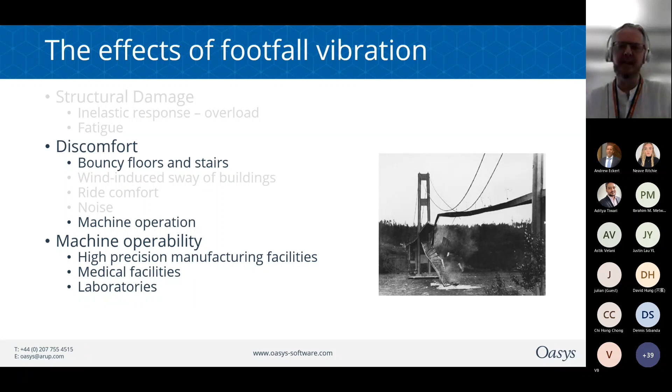But with footfall vibrations, this is something different. This is a serviceability limit state vibration, which is more about discomfort in the office or on the stairs, or operational problems such as we get in laboratories and hospitals.

So when people walk along, their feet impact the surface and this generates an impact force, and people tend to walk at a given pace. As the frequencies of the impacts are reasonably regular, these can set up resonances with the natural frequencies of the structure, which then cause it to vibrate.

But also you do get some floors which don't resonate because their natural frequencies are very high, and there we're looking at the momentary or transitory vibration problem which occurs on each step.

Now, there have been a number of design guides over the years to assist with dealing with the footfall problem. One of the first was the American Institute of Steel Construction's Floor Vibrations Due to Human Activity, published back in '97. Since then, we've had a number of further design guides.

We have the Concrete Centre CCIP-016, a design guide for footfall-induced vibration of structures. Then the Steel Construction Institute, which has published a number of guides over the years, updated their latest one, the P354, on floor vibration - a new approach.

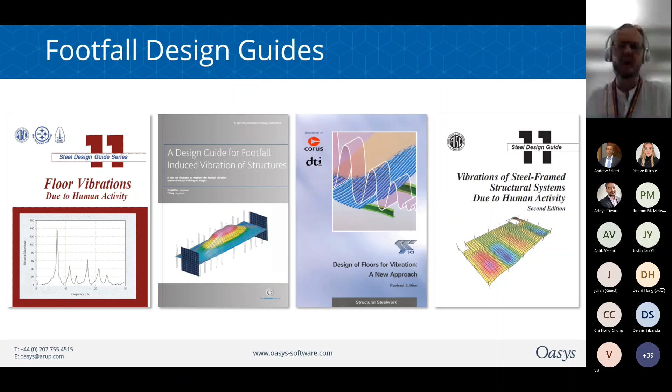And then the AISC updated their design guide 11 a couple of years ago, based on all the various research and indeed the other design guides which have come out over the years. Footfall analysis has also started being included in some design codes, and we'll look at that in more detail over time, along with some manufacturers' recommendations. So there is no one way of addressing this, apart from the GSA, of course.

Now, some of the guides do have simple methods to estimate the footfall response. In these simple methods, you take a standard floor closest to your actual structure, calculate the first two natural frequencies, then from there calculate the resulting velocities, accelerations, and response factors.

Now, these do have a number of assumptions built into them, and it is difficult to make them match up with the majority of real structures. Also, they have been shown by a number of sources to be quite unconservative and inaccurate in their results. But on the plus side, the formula there, 18 over the square root of the deflection,

is actually quite reasonable at predicting, at least approximately, the natural frequency of a floor. So if you can get the deflection from your model, that should give you a good indication, not totally, but a good indication of what the natural frequency should be.

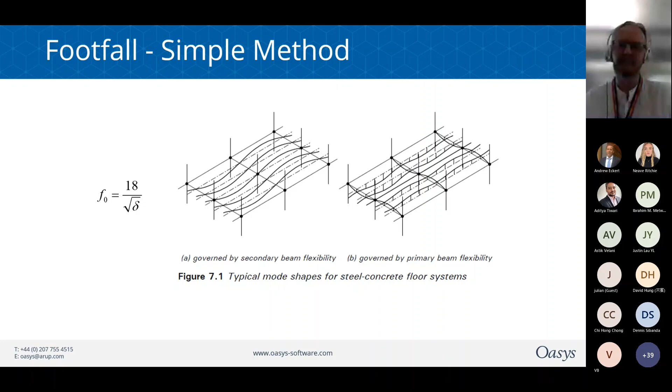Now, all the modern design guides do recommend that engineers use the finite element analysis approach. This FE approach requires analysis of a subframe, so in the case of a floor, or indeed the entire structure in case of a stair or a bridge, so the entire staircase.

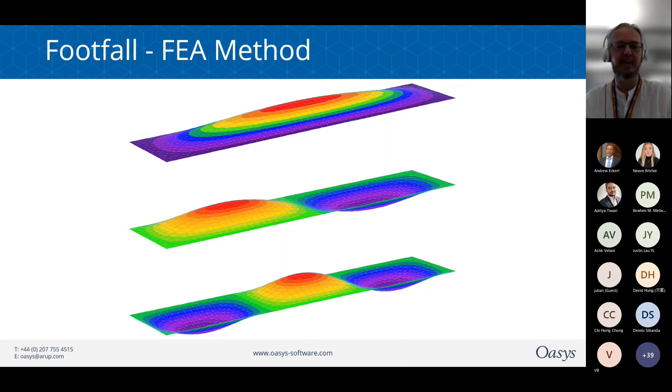It's a two-step process. First of all, you need to analyze to get your vibration modes with their corresponding frequencies up to a certain cutoff point. Now, what that cutoff point is really depends on the design guides and the respective maximum walking frequency you're looking at.

Now, when the structure vibrates, it doesn't do so with just one mode, which is the vibration shape or frequency, but with several modes simultaneously, even though the software will supply you with each mode as a separate result. Now, these modes actually interact to produce some quite complex movements.

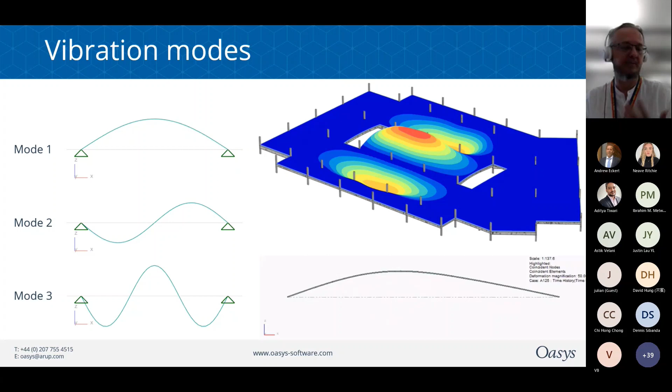And as you can see from the video on the bottom right, that is three beam modes acting simultaneously, in this case, with a time history analysis I did in GSA to extract those. Now, if you're looking at floor vibrations, these are considerably more complex than single beams, which again, is where the FE analysis comes in.

Now, once you have the vibration modes, you then need to do a subsequent analysis to calculate the velocities, accelerations, and then response values. Well, I'll say you need to, but speaking practically, let GSA do it for you.

Now, these values you need to calculate for the floor might be the peak values, or the root mean squared, or the root mean quad accelerations, and these might be expressed in meters per second squared or %g, depending on the design code.

And similarly, you might need to calculate the velocities, which might be in terms of meters per second or mips. And as I say, different design guides require different outputs in different situations.

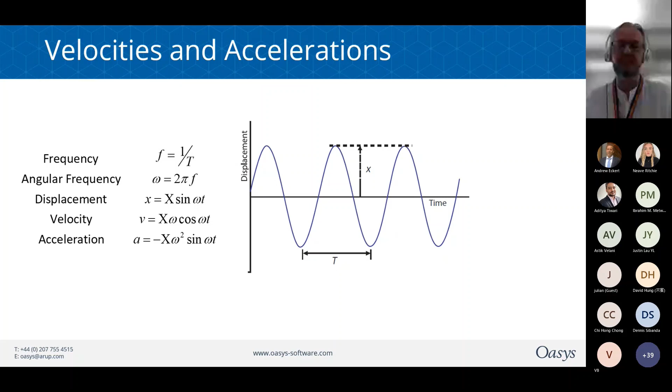Now, when we're looking at people's comfort, I think acceleration is the aspect we're most interested in, and it's their perception of vibration and whether this is a concern or not. And this depends on what people are doing at the time and their orientation.

Now, people who are standing up, or standing up and walking around, may be least sensitive to the vibrations. People are most sensitive when they're lying down.

You'll also note from the ISO baseline curve, the limit of human perception on the right hand side, that we are most sensitive in the frequency range between 4 and 8 Hertz. And these are apparently the frequencies at which our internal organs resonate, which, yeah, you can understand is going to make things uncomfortable, or at least make us more sensitive.

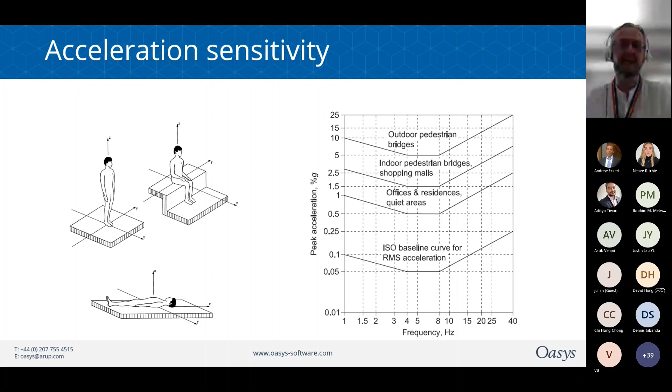Now, the downside is this is the range that most floors also vibrate at. Now, the AISC guide says you can just conservatively take 0.5% G for office floors, whereas other design guides recommend using a weighting curve to adjust the frequencies depending on how sensitive we are to them.

Under 8 Hertz, for a building, you shouldn't be getting those frequencies, but for a bridge, you might do. But anyway, generally, if you've got a footfall problem, you want to try and keep the frequencies high.

Now, the relationship between the accelerations and the different frequencies and the limit of our perception give us the response, or R value, which is essentially an acceleration, or an acceleration in relation to the baseline acceleration curve.

So the response of the structure to footfall is not just dependent on the frequency of the floor, but also the mass, or to be more accurate, the modal mass of the structure.

So to keep it simple, the modal mass is essentially the mass of the structure which is moving in any given vibration mode. So for example, you could have a long span floor which will have a low natural frequency, but it also has quite a high modal mass to resist the footfall force.

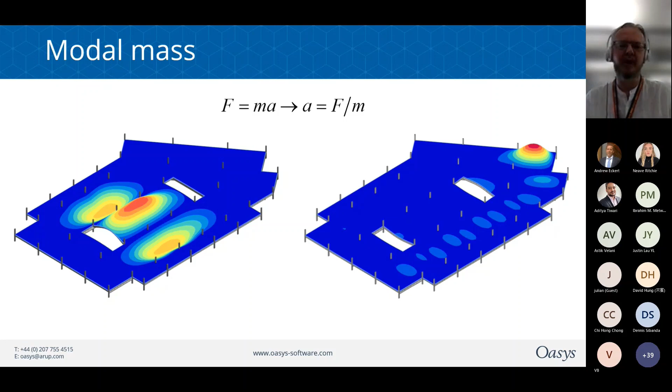Similarly, a short span can have a high natural frequency, but as it has a low modal mass, it can experience high accelerations. In other words, a high frequency floor can have a high response, but again, not necessarily. You do actually need to run the various calculations for each situation.

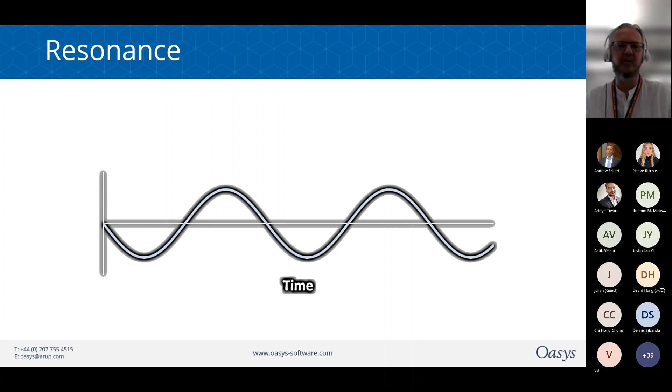Now, I mentioned resonance just now. So what is that? Resonance is when vibrations build up over time. Take this example: we've got a floor which vibrates at a particular frequency. If that frequency is the same as the walking speed, then each footstep will push the floor more and more, which increases its amplitude and acceleration.

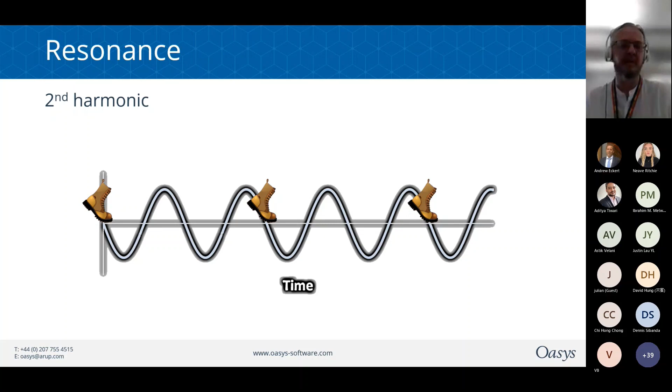What's more likely, though, is the footsteps may interact and resonate with every other cycle of the floor, because we exclude those very low frequencies from our design and prevent them from occurring. So if we're interacting with the second harmonic, the footstep lands every other time the floor bounces. Or the third harmonic, or the fourth harmonic.

Now, there's a fallacy I've heard that says you need regular bays to build up resonance. This is not the case, because vibrations over multiple bays actually tend to have a large modal mass, which lowers the response. The main problem is actually isolated bays, which don't interact with other parts of the structure, and these tend to have a high response value, as they have a low modal mass.

What can be important is the physical width of the mode, thus how many footsteps can fall in any given location.

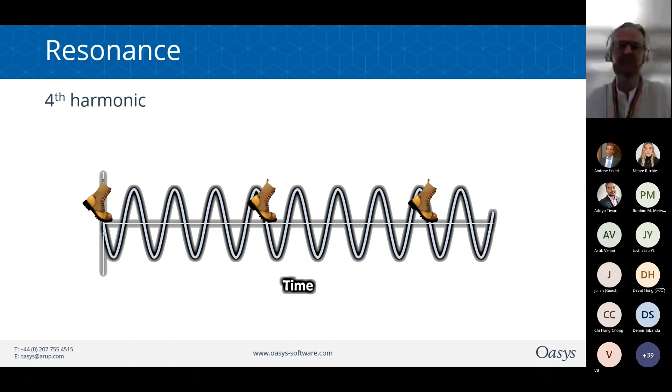Now, if this resonance was unchecked, like the induced vibrations of the Tacoma Narrows Bridge, it would eventually destroy the structure. Thankfully, structures do have imperfections in them, and these imperfections absorb the vibration energy—this is the effect we call damping.

You might also hear the term critical damping in vibration engineering. This is the level of damping where the structure will return to its original position in the minimum time after dynamic movement. More damping will slow the return to the starting point, and less damping means the structure can overshoot.

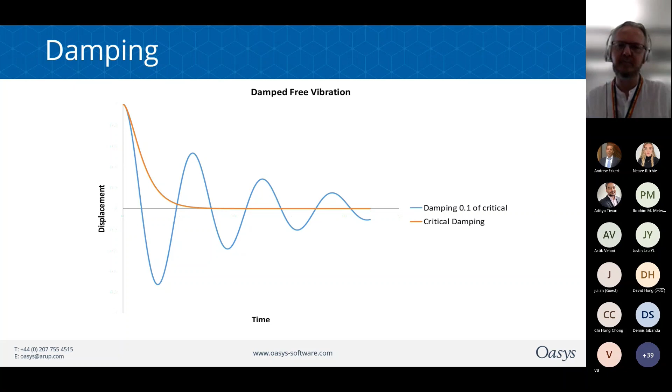So as I mentioned, with no damping you could have huge resonant vibrations where the natural frequencies of the structure coincide with the forcing frequencies, or the walking speeds. You could then get large amplifications of structural movement, but how much depends on the damping.

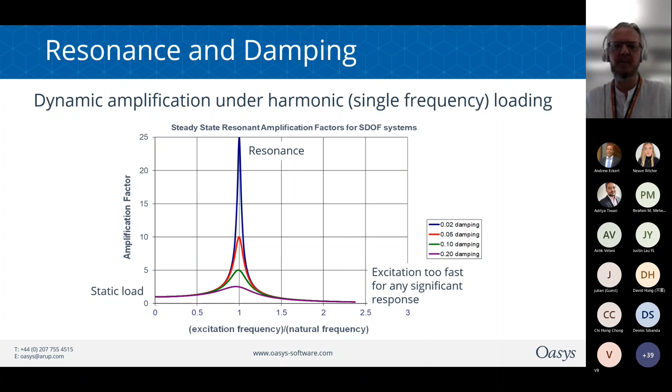Now, the damping of a real structure ranges from about 0.3% to about 4.5% of critical damping, which depends on the construction and the fit-out.

Now, resonance occurs with not just the fundamental frequency, but also the harmonics as well. Here we can see huge amplification occurring when the forcing or walking frequency is the same as the structure's, which is again why we normally ensure the fundamental frequency of the structure is higher than the maximum walking speed. So if we exclude that first harmonic, we can look at the second harmonic and beyond.

You'll note that we've got resonance occurring with the second, third, fourth harmonic, but also the fifth and sixth and so on, to an increasing diminishing amount.

Now, we don't normally calculate beyond the fourth harmonic. For staircases, we only calculate the first two harmonics, because beyond that stage, people walk at a reasonably constant pace, but not sufficiently constant to have much influence on the higher harmonics.

Now, as well as resonant responses, you can get transient or impulse responses on high frequency structures, where the vibrations die off before the next footfall lands. Thus, in this case, it's the first peak acceleration that's calculated, and here the damping has very little effect on the results.

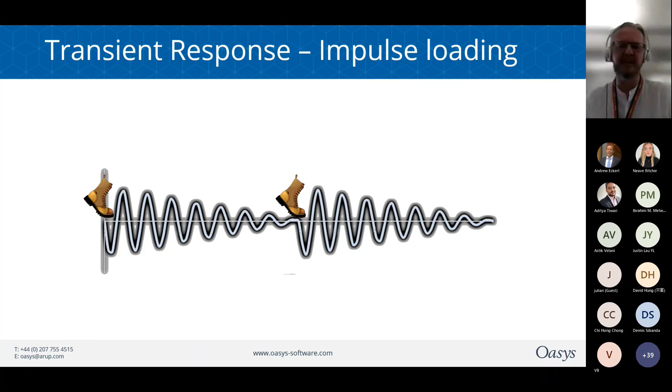Now, to find the accelerations, we also need to calculate the force that each step generates. Not all the weight of the walker is translated into a force on the floor, and the design guides have recommended various dynamic coefficients or load factors, which correlate the weight of the person walking to the various harmonics. GSA does include these as standard already, but you can also add your own, which you may need to for certain cases.

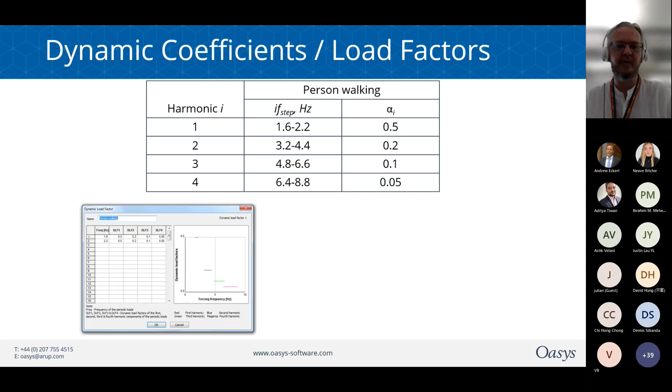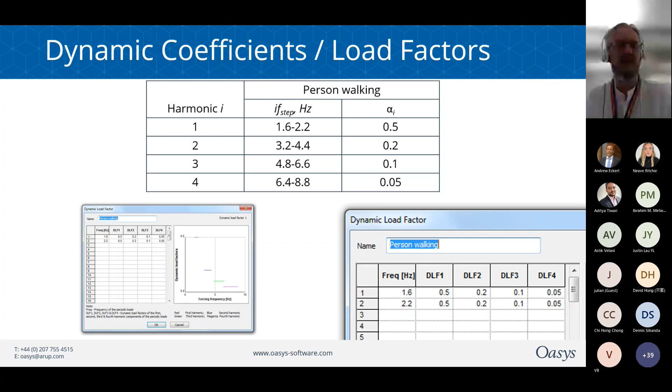So we have the dynamic load factor table for these user-defined values, and that's a bit small, so let's zoom in a bit. You'll see that we actually specify the load factors, for just the first range of frequencies, because we know we don't need to specify the higher harmonics—the second harmonic is twice the frequency of the first, and so on.

You don't normally need to add these, but if you do, they'll appear automatically in your footfall analysis dialog, and any DLFs you've added will appear at the bottom of the list.

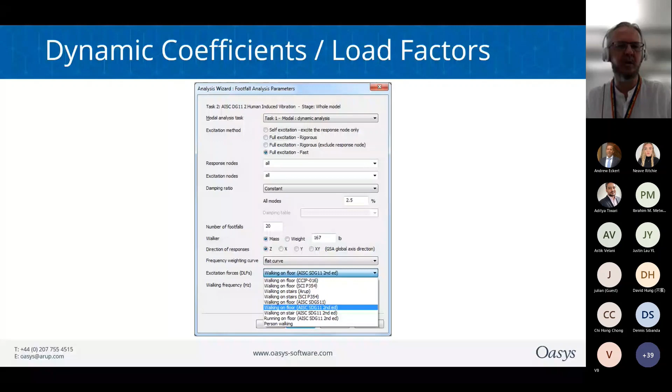Before we can analyze a model, we have to build it. For a steelwork structure, we need to model both the steel beams and the floor slab, with a mesh density sufficiently high to get accurate results—aim for 8 to 10 nodes in any principal span. Minor spans can get away with less, but major beams need 8 to 10 nodes.

Strains are very small under footfall vibration, which means the shear friction in bolted connections is not normally overcome by the range of movements. So for footfall vibration, you would normally model all shear connections as being continuous or moment connections.

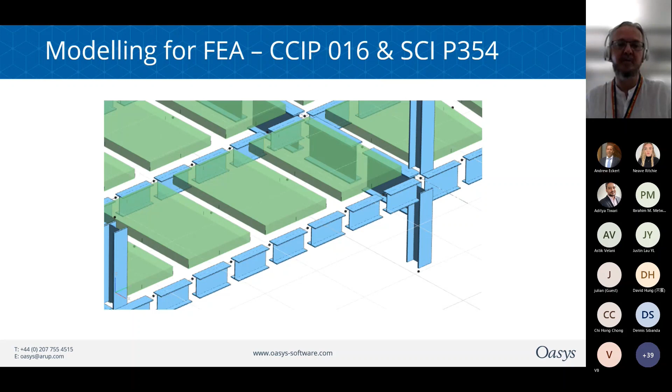We also need to make sure we offset beams and slabs to generate composite action, even if the beams themselves are not designed as composite in the ultimate limit state. The friction between a steel beam and a precast concrete plank, for example, is still pretty high as far as vibration is concerned.

The AISC Design Guide is slightly different. The Concrete Centre and Steel Construction Institute guides say to offset the beams and floor shells to automatically generate the composite properties, while the AISC Guide recommends you explicitly determine the composite section for each beam. This has the advantage of giving much greater control over the stiffnesses, and you can likewise increase the stiffnesses of edge beams, without worrying about the neutral axis position.

In principle, all the beams should be at the neutral axis of the composite section, but to be honest, with multiple beam depths this varies over the floor. With the AISC approach, you can set the neutral axis depth explicitly for each section. The downside is you'll need to define the outline of every one of these sections, which is a little bit involved.

Also watch out for self-weight or mass calculations. The floor slab gets converted into an equivalent steel section, and there's a big risk of double counting the self-weight if you're not careful.

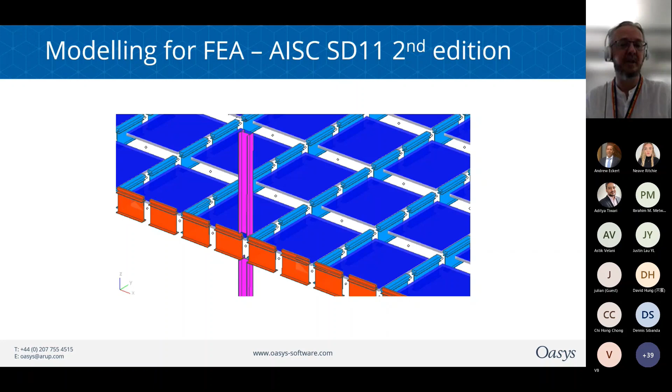It's also good to include the columns rather than just support points, since these add stiffness to the floor. How long these columns need to be is a matter of some debate—you can model them full height to the next floor and fix the ends, or go half height and pin the ends. But in general you do not need to model multiple floors, unless you definitely expect sharing of vibration between the floors. It's not so much an issue for transfer structures since they normally carry a huge weight, but there may be structures which hang off another and so on.

As far as partitions and cladding are concerned, you can include these wall lines as spring stiffnesses, or explicitly include them as shell elements or plane stress elements, or you can just pin them in position. Each design guide will have its own recommendations on the best approach to take there.

You also need to have the loading. Unlike ultimate limit state modeling, in this instance low weight is actually the worst case, so you should include the minimum credible dead load and the recommended live load, normally 10% of the maximum. GSA will then convert these loads into mass as part of the analysis. Since mass resists accelerations, lower mass is actually more conservative—the lower the mass, the higher the response value.

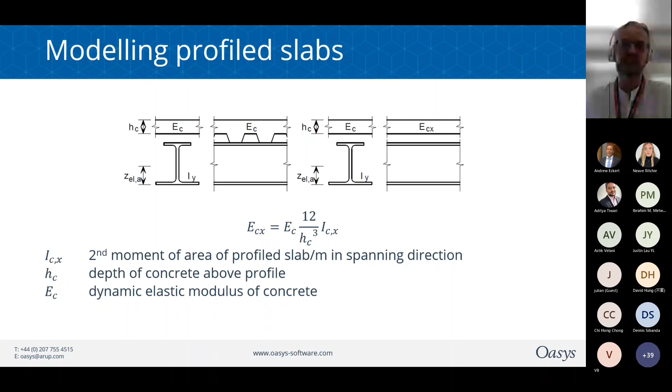At this point, we're going to look at how GSA works in action. So check this up here. Here is a model I prepared earlier. You might recognize this — it's a model I created quite a while ago, but it encapsulates a lot of the good parts of a vibration analysis.

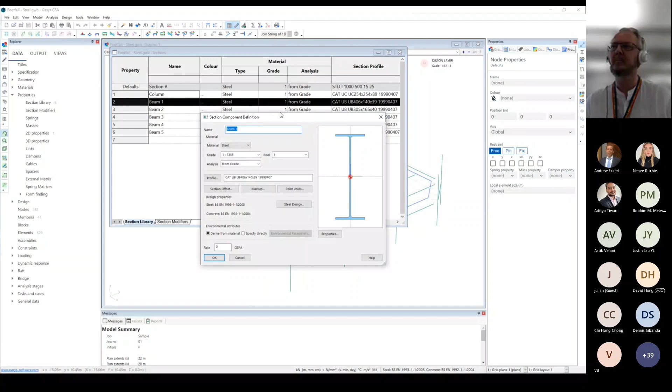Here, in this case, I'm on the design layer, so I have a number of steel beams with a single floor slab over the whole of it. Properties-wise, let's go into the section library — you see the various beams. We are taking standard sections, and we can use automatic offsets.

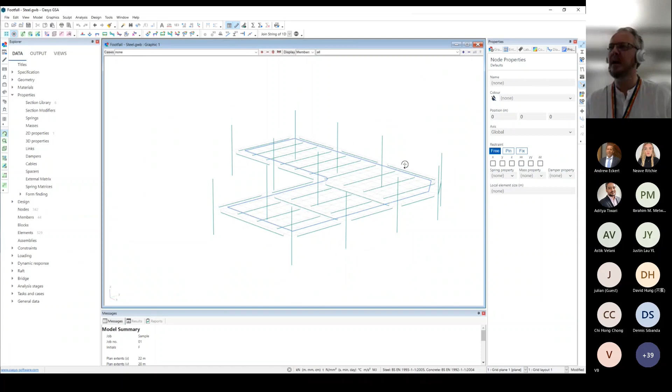Actually, in this case, I've offset the elements, or members, directly to the top flange. Likewise, we could offset the slab — in this case, we've offset it on the element itself.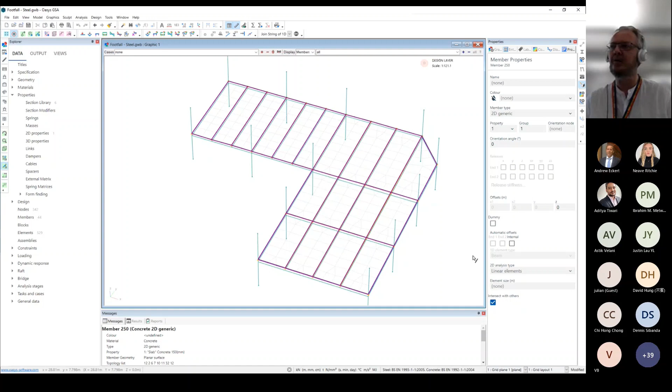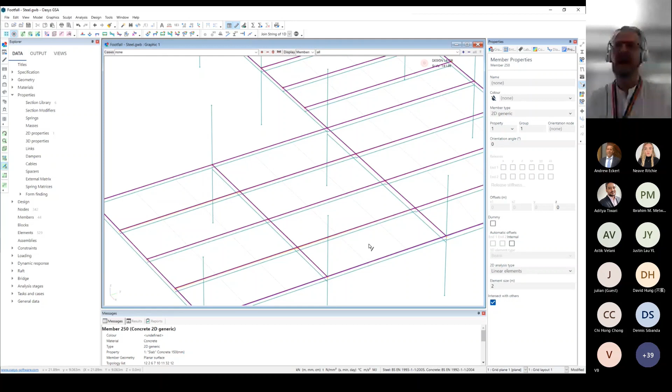We also need to worry about mesh density. The good thing about GSA these days is that we don't need to worry too much — we can be quite flexible about mesh density just by changing it on the slab itself. The default mesh density of 1 meter is actually looking pretty good, and you can see the preview of what mesh is going to be created. If the elements were too large, we could reduce the mesh density, and this will automatically change the meshing on the beams, or we could use a larger mesh — you can adjust this entirely to suit. But in this case, a 1 meter mesh looks about the right sort of thing.

We then need to create the elements, and then I'll swap over onto the analysis layer, where we can see the mesh structure.

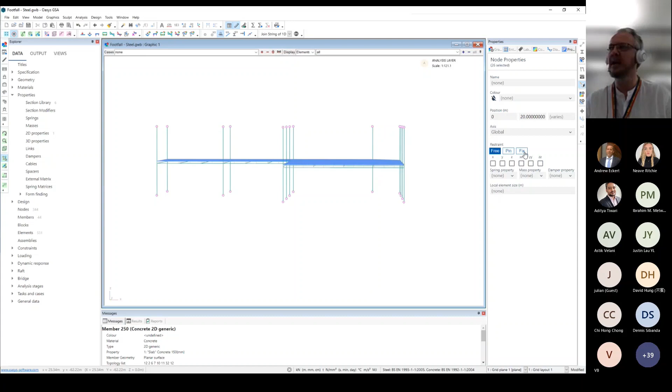Now we do need to worry about the restraints. In this case, I've modeled the columns as full height to the adjacent floors, so I'll just select those end nodes and fix them in position.

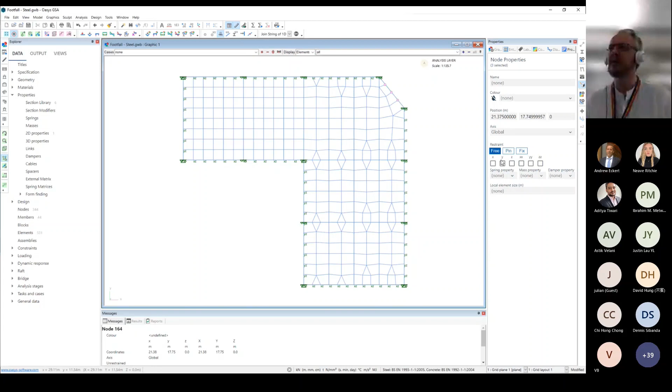For the cladding line, since it's quite a small structure, what I'll do is go around and select those north-south nodes, giving them a Z restraint and a Y direction restraint. On the other direction, give them a Z and an X direction restraint. And on this corner over here, maybe just a Z — it's too small to worry about. If it was a larger area, I could maybe give a rotated axis and so on, but I think that will suffice. I do know you get this occasional pinning in the corners, but that's entirely as we expect.

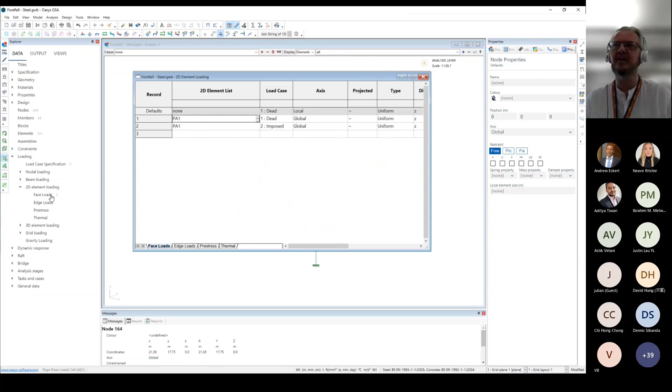Now for loading — self-weight is calculated automatically, so gravity loading is unnecessary. What we do need is face loading on the 2D elements, which I've already set up. It's a parametric load, so it's picking up the 2D element properties and automatically applying loads to those, as we can see here.

We can also look at materials. For steelwork, not so much, but for concrete, yes — when doing a footfall vibration analysis we tend not to use the normal design Young's modulus, but instead use a higher value of 38,000, which might be changing. I think I've seen proposals in the Eurocodes to maybe have this dynamic modulus of concrete based on the design Young's modulus.

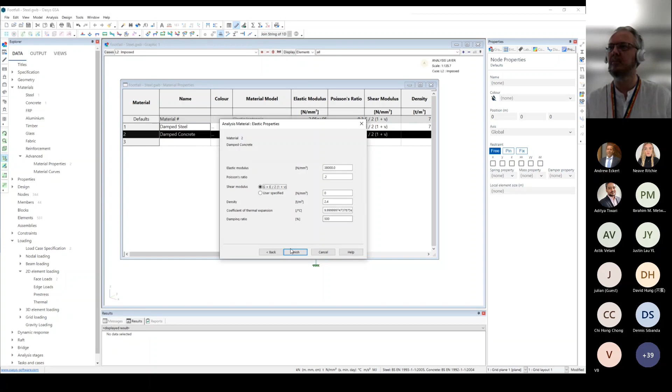Here it is. This will need to be set in the 2D properties, and we can use the damped concrete value in our slab analysis.

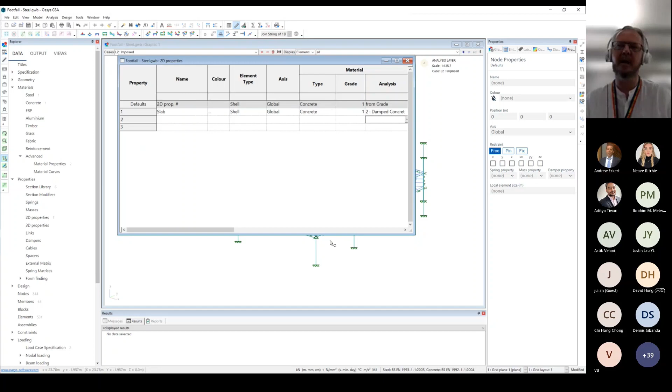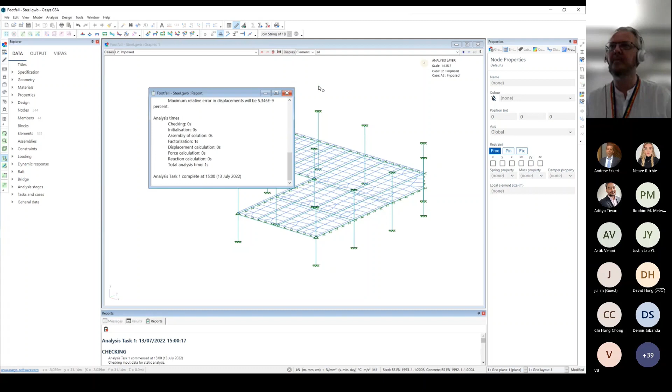So what we can do now is create, first of all, a modal analysis task. Though, before that, it can be quite useful to quickly run a static analysis just to make sure everything is connected together and deflecting well. So, yeah, that looks not unreasonable.

Delete those results and create a modal analysis task. Now the question is, how many modes do we need? The exact number will depend on how big the structure is. This is quite a small structure, it won't need that many. But what we also need to know is, is it a high frequency structure or a low one?

So what I'm going to do is run a single mode just to begin with. I'm going to add in my dead and live load and take 10% of the live load, and you see the self weight has been calculated here automatically. I'll analyze that and see what we get.

So the first mode, you can see we're getting a frequency of 5.4 hertz, a very typical floor frequency. Now this is below 10, below 12. This is a low frequency floor, and so we need to go up to 15 hertz as a cutoff point to make sure we get good resonance analysis. Resonance will dominate in this structure.

If this frequency was above 10 or 12, depending on the guide, this would be a high frequency structure, and we would need to have modes up to twice the fundamental frequency, either of the structure as a whole or the particular area of interest.

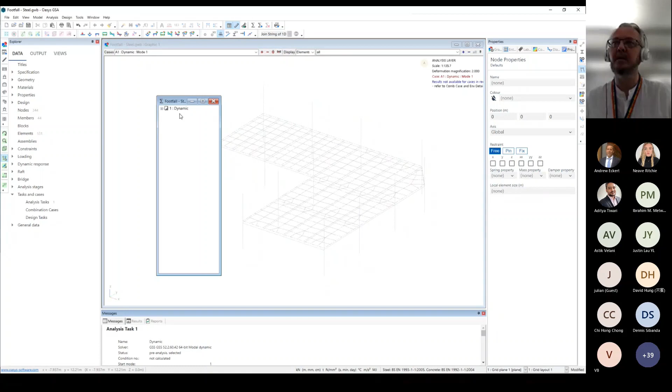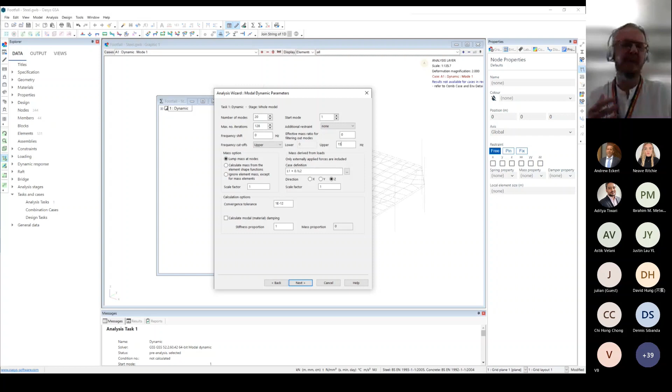So what I'm going to do is delete those results, go into the task, edit it, and say let's say 20 modes, but we're not interested in modes above 15, so I'm going to have an upper cutoff and say ignore modes above 15 hertz. So what will happen is that it might calculate those modes, but it won't save them. And run that.

And so out of those 20 modes, you see actually the first 10 cover things. Okay, so what do we have?

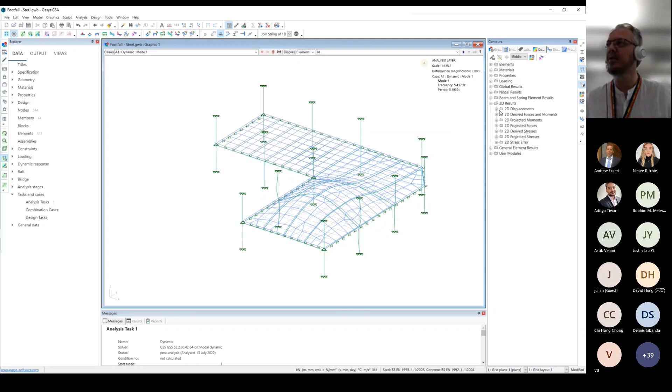So obviously we can look at the results in the graphical view, and we can see the frequency in the corner, and we can look at the various modes, and they all look sensible. And of course, importantly, we haven't got the whole structure slewing sideways, which can happen if you've forgotten to restrain it properly. And these both look all right.

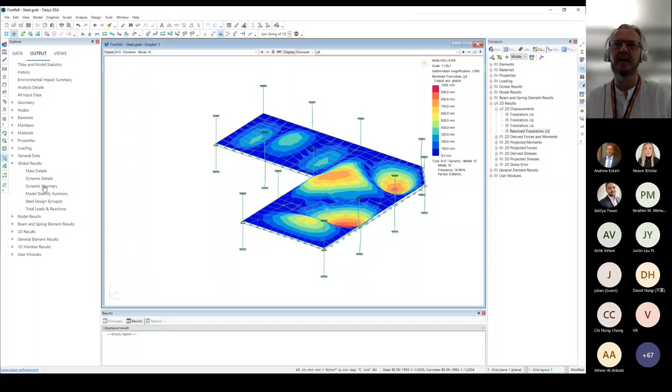We can also look at the numerical values. So go to the global results dynamic summary, and we can see we've got the modes from 5.5 hertz up to just shy of 15 hertz. Anyway, these modes all look good.

So what we can now do is add in a second analysis task, which is a dynamic response footfall. This uses the modal analysis as the base point, as we can see here. And note that if we had multiple modal analyses, which we can do, we could then have a choice of which modal analysis we choose.

Excitation. Now, so the excitation is how are we exciting each of those? Are we just walking on one particular spot and measuring the response at that same spot, or are we walking on the spot and then measuring to see how that affects the rest of the structure?

Now, self-excitation means excite the response node only, and this will generally give you the peak values, but won't give you sort of lateral effects.

So one of the problems, for example, in a hospital operating theatre: there are very stringent vibration requirements in an operating theatre, and also people tend to walk slowly in an operating theatre in general, but you might have people rushing past in the corridor just outside.

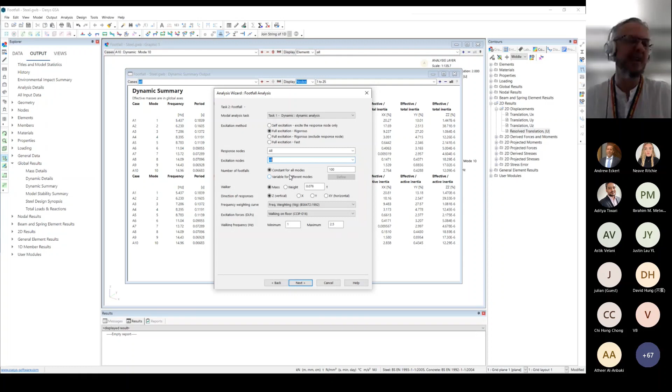Note this only affects resonance, not transient results. We have the weight of the walker, direction responses, which is the weighting curve we want to use, and the excitation method - we'll use a Concrete Centre method to begin with. We do have various other floor and stair options. We also have the maximum minimum walking frequencies.

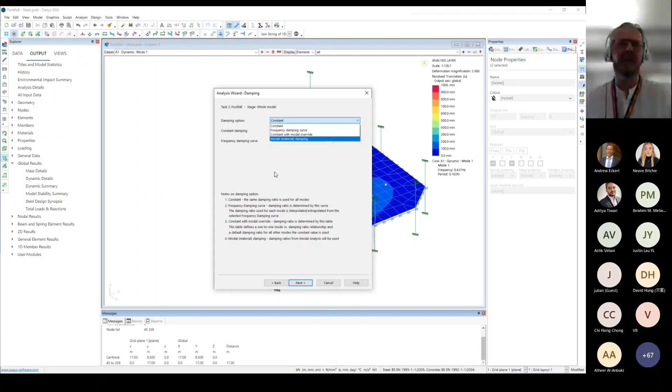GSA will default to the extreme values, but if you know how the space is going to be used, you can bring in these values. To begin with, I'll leave them as full. The damping, which can also have more advanced options if you're a more experienced vibration engineer.

And let's analyze that. And that has finished, so let us look at the results. Switch deflections off - doesn't make too much difference.

The contours - so nodal results. We do get quite a lot of options of nodal results. Let's go for the summary first of all. Here we have the overall maximum response factor, which we can break down into the transient response and the resonant response. And you can see, as we expected, the overall is mostly the resonance, that's almost entirely.

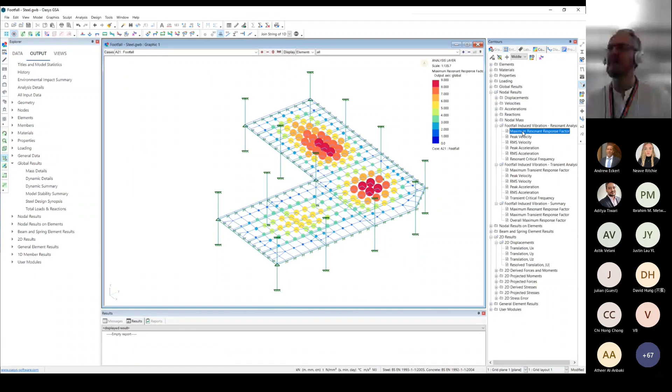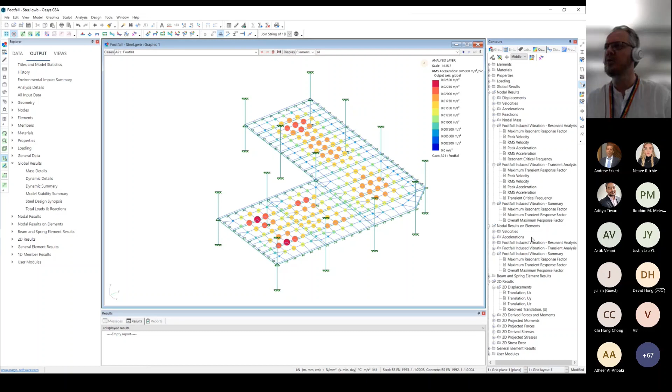We can also get to more detailed results, such as peak velocities, accelerations, and so on, and also which is the critical frequency which actually caused that footfall. Similarly, we have the transient accelerations and so on. Now, we have these nodal values because this is where they're actually being calculated. What we'd like to do rather is smear these results onto the elements they're attached to, and then we get a much nicer full contour, which I find much easier to read.

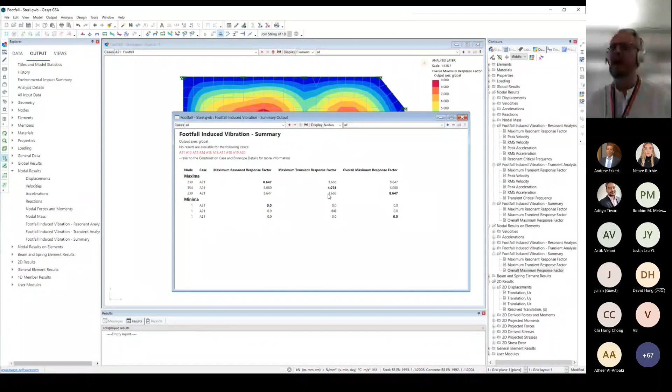We can also get the results directly from here. So if I just open up the summary of the summary, we can see that the maximum response is 8.6 on node 239, and transient response 4 on node 354 - a different location. This is quite normal.

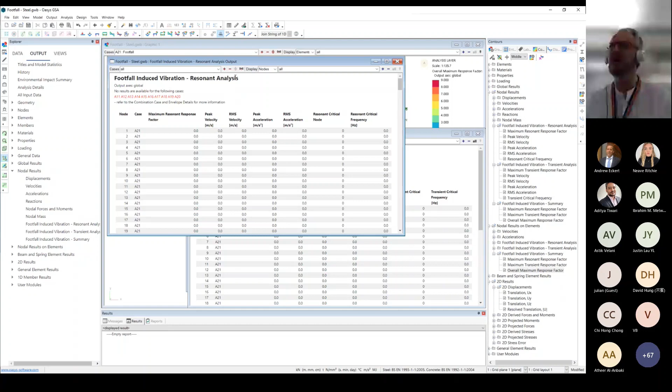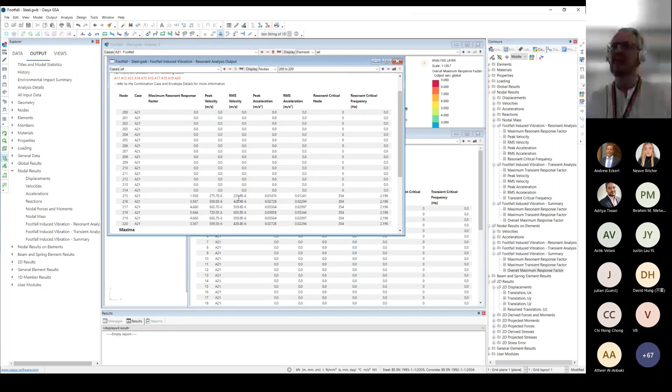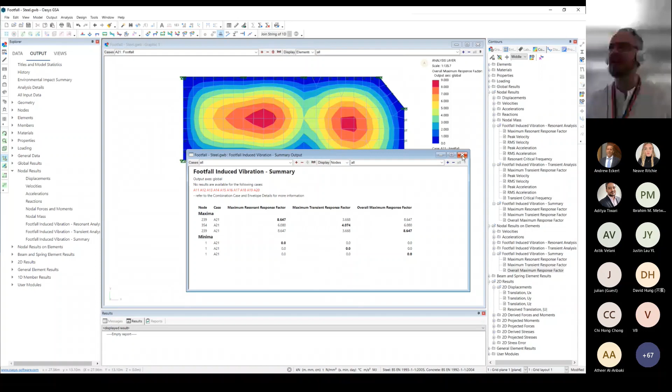On the other hand, if we want, we can get results in much more detail - either the resonant results, so we can see the various... we can see the results on some of the nodes, and likewise the transient nodes. There are various results in there to drill down and see exactly what's going on in detail.

We can drill down even further. Actually, not that one - let me just pull up the summary of the summary. Node 239 - this is the location where we get the maximum footfall response. Where is that in the structure? Maybe one of these two red areas. I'll just find - was it 239?

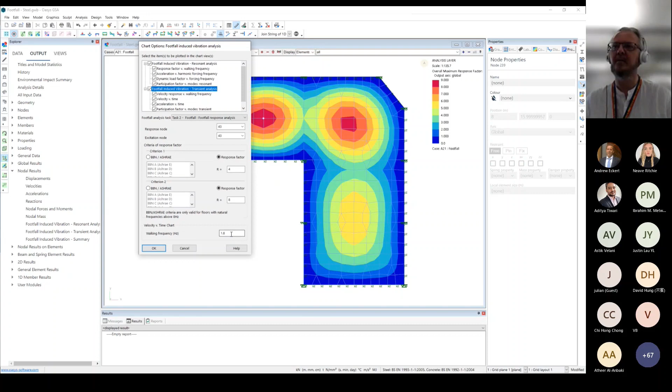That spot right there, not unexpected. So what's happening at that spot? Let's go and draw up some chart views of the footfall analysis for that particular node. We can look at the resonant analysis and the transient analysis for that location, at a speed of 2.2, which is the worst value.

We get a number of graphs out. First of all, the transient response - this is the momentary vibration, not governed in this case, but could be. We can see the results for which modes drive the vibration at that location.

So if you know you've got a high response, you might want to adjust the structure to not resonate so much at that location. To do that, you need to know which modes are influencing that. In this case, mode 2 and mode 10 are most dominant.

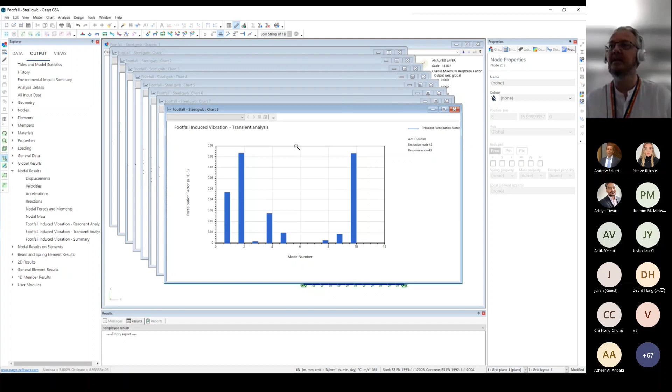We can see the vibration acceleration over time and the velocity over time. The transient response versus walking frequency - you'll note that transient response always increases with walking frequency. Reduce the top speed or walking frequency, and you will reduce the transient response.

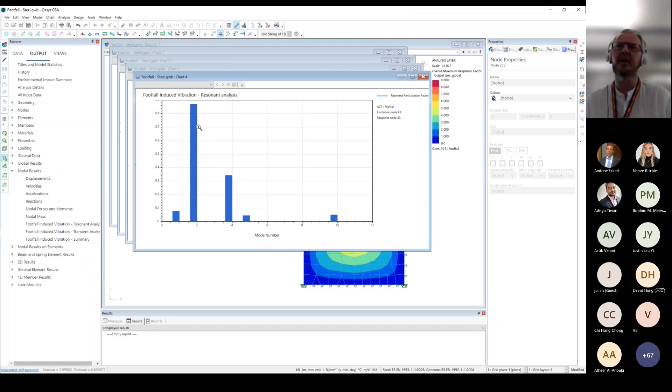Resonant analysis gives a different set of modes. Mode 2 again, but mode 10 has very little influence on the resonant analysis. So if you did want to address this particular vibration, mode 2 would be the one we might need to suppress.

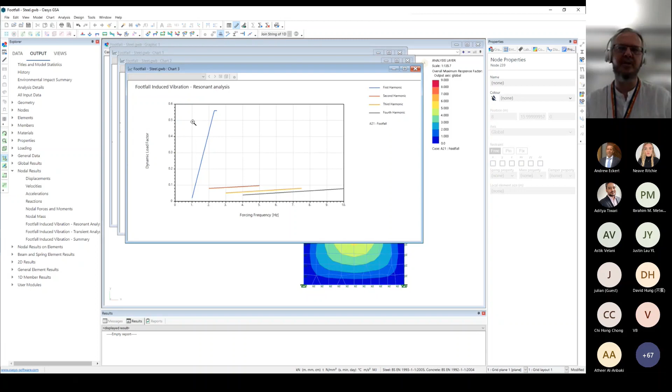We have the dynamic load factors. We used the standard ones from the Concrete Society guide, and see if those are there already. Then we get the resonant frequencies, accelerations against forcing frequency, which is almost as useful as the next graph, which I think is my favorite.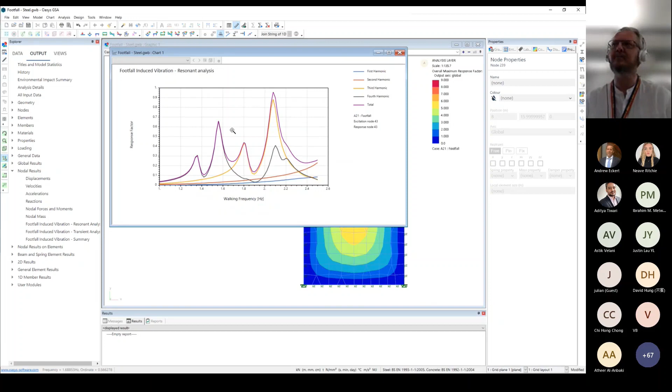Let me just enlarge that a bit. So this is the response factor versus the walking frequency, and we see we are getting quite a complex result. Let me put the cursor tooltips on the nearest points. So we are getting the peak value at a walking frequency of just over 2 Hertz, and the lower peak at 1.6.

At 1.56 Hertz - note that this is a walking frequency range of 1 to 2.5 Hertz. If let's say we're working in the operating theatre, maximum walking speed, and the guy says 1.8 Hertz, we would have a cutoff at this point, and the response value would drop from 0.9 down to 0.6. That is quite low.

That's the results. Now then, what else? How are we doing for time? Not too bad, we're running along.

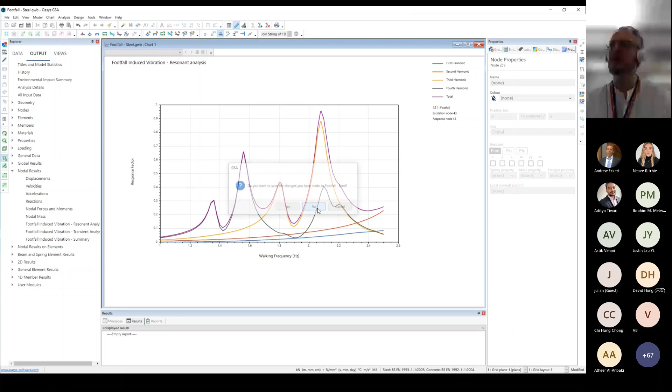Let me just quickly show you another model. That was a very simple model, but here is a more complex one. Let me switch over - in this instance, we needed just shy of 100 modes to analyze this structure, and these modes go from very simple up to quite detailed and spread out.

If we now look at the footfall results here, we can see that in general the floor is mostly good, with 1D elements mostly good too, but there are some definite peaks. There is a peak down in this corner over here, which is a reasonably isolated bay, so we're getting a high response just in that area.

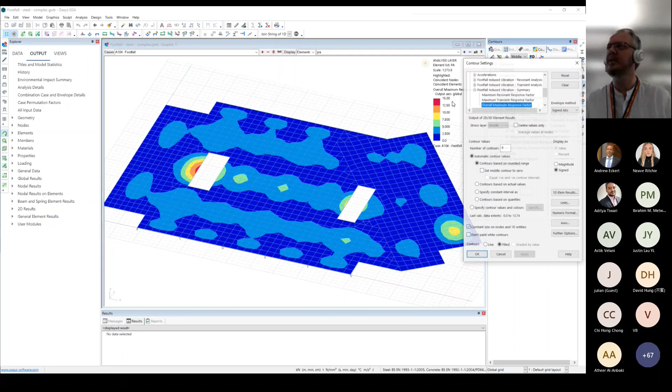But also we're getting a very high response next to these atriums. Now, let's say the target value was 8. There's lots of contours here - let me adjust these contours. What I'm going to do is specify 8 in there, and then worry about what comes afterwards.

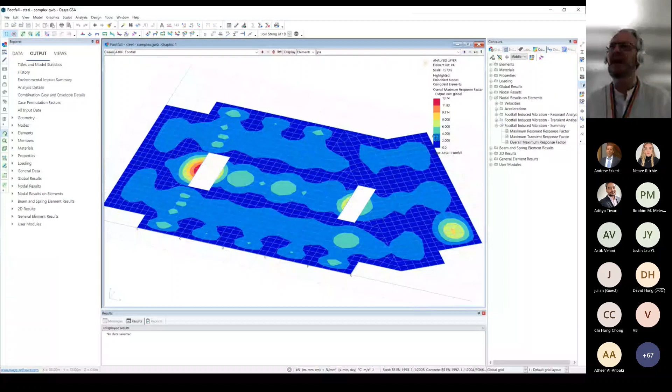So in this case, I've got blue and teal as okay, and then yellows, oranges and reds are bad. So we have a huge response next to this - this is an atrium, is it a service duct? Staircase area opening, anyway an unsupported edge. These are classic problem areas - not only is it an isolated mode, but also you've got a large free edge and no continuity.

How do we deal with this? Well, there are various ways of dealing with vibration problems. One is adding extra structure, maybe a supporting post, maybe a beam across, maybe increasing the weight of the slab, getting the slab to increase the mass.

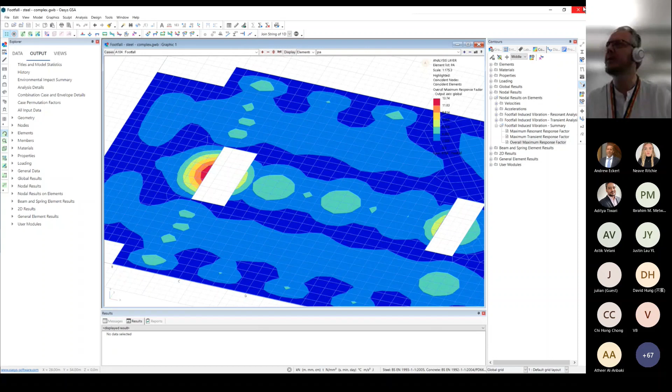Actually, on that note, about increasing the mass - let me come back to here. Occasionally we get support questions which say, I've increased the thickness of the slab, and the footfall response has got worse. This is a bit unintuitive.

You have to remember the effects of changing the structure and what that does on the vibration responses. So, for example, you increase the thickness of the slab - this increases the stiffness, and it also increases the mass. Now, increasing the mass will tend to lower the natural frequency and reduce the response, whereas increasing the stiffness tends to increase the frequency. So in many respects, increasing the thickness both makes it better and worse simultaneously.

To what degree in each direction? Best you analyze it.

But do note that changing the structure, changing the mass, changing the thicknesses, changing the beam sizes will move these peaks around left and right, the natural frequencies, but also vertically, the response value.

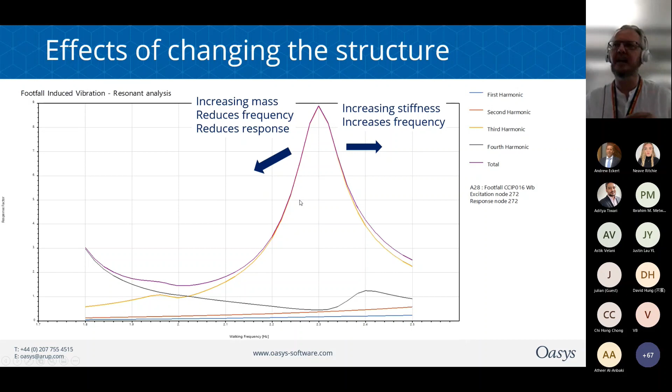Now what can happen then is, if you're using the SCI guide, you increase, say, the mass or the thickness of the floor. This peak here does move down a bit, also moves left a bit. But the question is, where does that line then cross this 2.2 hertz? What can happen is, even though it moved down and left, this crossing point can then move up. So you effectively increase the response value by increasing the mass. If you move this peak right into this zone, well, it just pushes all the way up.

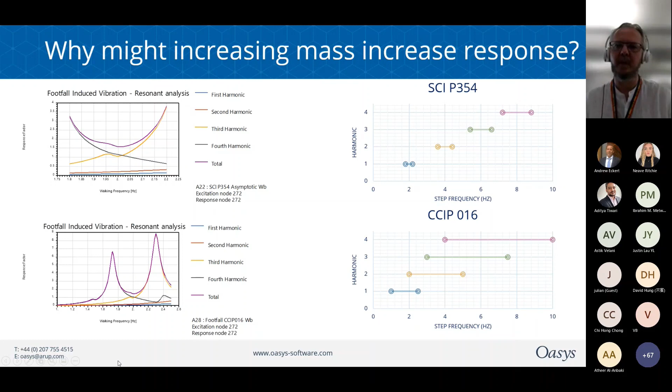Now if you're looking at an existing structure, it's good to know what existing accelerations you could be expecting from footfall. So at Arup, we do have a Footfall app, which is iPhone only at the moment. It uses the phone's accelerometers to measure the real structure's response. And I do know that Expedition has produced a similar app, this one for Android phones. And indeed, there may be others that I'm not aware of.

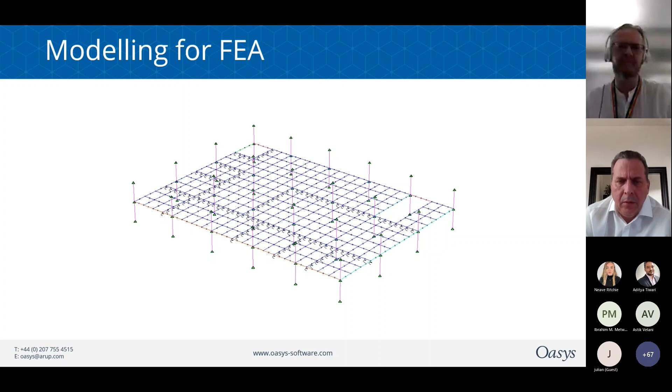Okay, right, our next question is: using the SCI P354, is there a situation where you might consider just steady state or transient state analysis, or should you consider both in all instances, such as staircases and hospital wards, etc.?

Well, if I remember correctly, it says you would look at resonant analysis for when you're below 10 Hertz, and then transient analysis above 10 Hertz. But the good thing about GSA is it automatically calculates both for you - you can't switch them off. It does them both, they are free for you, and then you as an engineer can make the decision which are appropriate to include.

Yeah, at Oasys we like to avoid black boxes. We like to give you everything, and then you can choose which is important, so that decision is entirely up to you. So the good news there is that GSA does both of those analyses for you, and you can pick which answer you prefer, but both will be included in that package.

The next question we have for you, Peter, is somebody wants to know the definition of the number of footfalls when we're assigning the parameter for the footfall analysis task. For example, number of footfall 20 - does that mean 20 steps on each node at every minute?

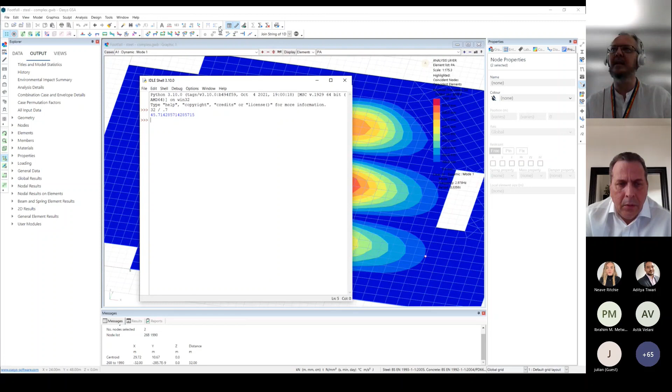So we'll then say in the footfall analysis, I'll then put maybe 46 in there if that is the longest mode. Now we can, this is obviously in large modes and small modes, we can subdivide this, go vary with the different modes and say, well, that was mode 1, so mode 1 I do 46, and then really drill down and fine tune each particular mode with each number of footsteps as appropriate. A lot of work. Now, what does this 46 or whatever or 20 actually mean?

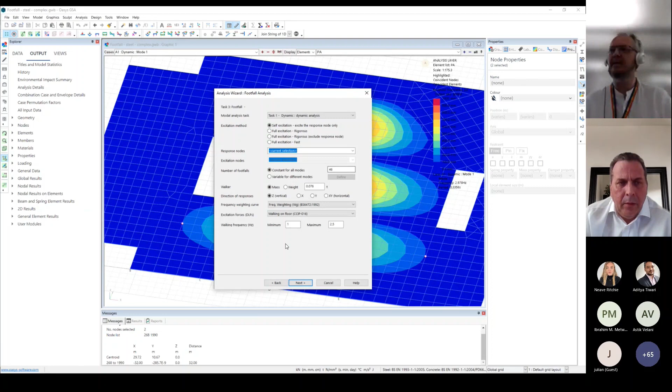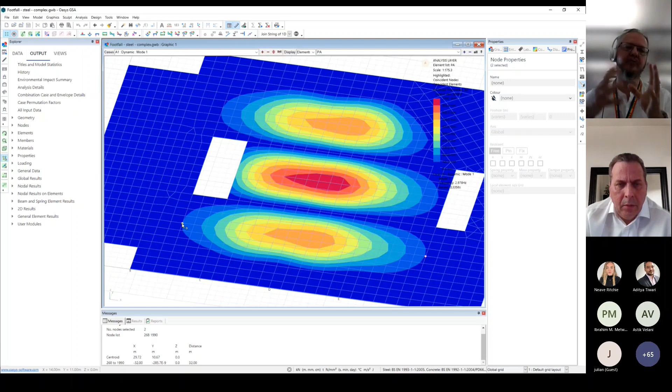Strictly speaking, the person is walking along the floor, and so they won't excite each node directly. They excite each node in turn. But what we need to do in the analysis is actually excite each node with 46 steps, which on the face of it is a little conservative, but the design guides recognize this, and they then give it a formula which then reduces the results based on the effect of somebody actually walking. So it's an empirical approach to estimate the response and then reduce it to take into account that they're actually moving rather than essentially walking on the spot.

Now this does fit in with their research because they use vibrating machinery to measure the responses of real structures to validate the responses, and obviously they don't walk around. So there's a certain amount of adjustment to the maths that goes in.

Ideal case would be to actually model somebody walking, and then see what the response will be. Downside to that is you would need to model people walking at every possible frequency on every possible route over the floor, which would be an astronomical number of calculations. It would be more accurate. Whether it would be worth the effort, that is a decision for you. But yeah, it's a shortcut to avoid the necessity to model every possible route, which would be a crazily large number.

Okay, well, we've got time to answer one more question, Peter. Then those of you who haven't had your questions answered, we have logged all of the questions that have come in, and you will receive email replies in the next day or two. But for now, the final question is, what would be effective ways of improving the vibrational response of an irregular floor plate in the interests of embodied carbon?

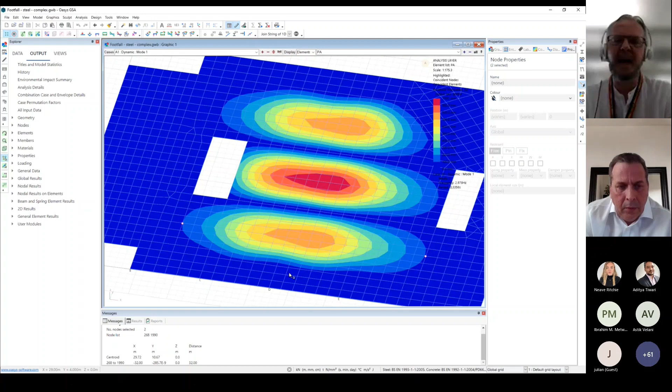The other thing to look at is if your design has a particular problem, so you see this mode is causing the vibration, you think, well, how can I suppress that? So, I don't know, in this case, maybe a bigger beam across here, which ties those together. And a lot of this depends on whether the footfall response is actually governing the design or not. Sometimes ultimate limit state is fine, and you check the footfall vibration, it's okay. Other times it's not good enough, and you might have to add in additional structure to make that work.

If existing structure, yeah, you can add in additional structure. Alternatively, I did see one case where there was a particular hot spot in the existing structure, and the solution was to stick a large plant pot there. Not only do people have to walk around it, there was also suddenly a large mass at the point of maximum excitation. Yeah, there is no one answer to a hypothetical design question.